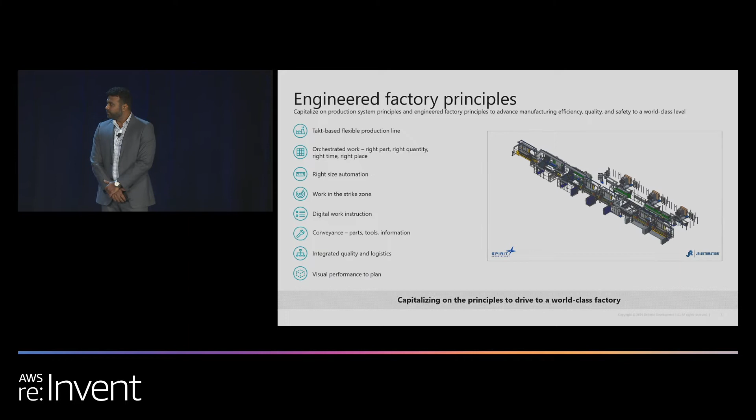So the project we're going to talk to you about today is called FloorSight.

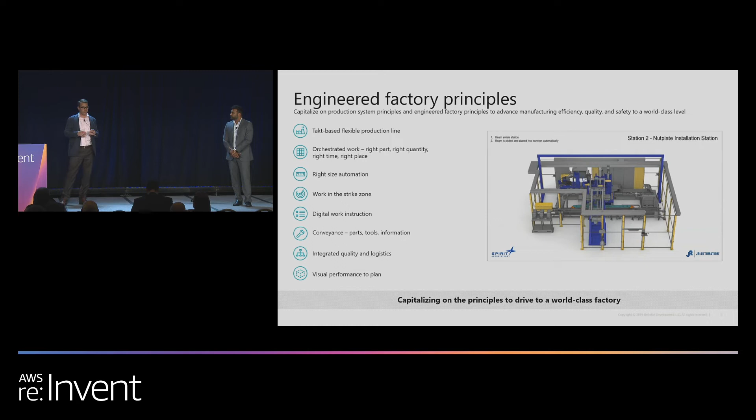Before we get into the details of that, we really want to talk about the broader portfolio of projects we're using to transform the way we do work. There's about 50 projects. One of them is on the screen here.

It's a new production system that we just finished 100% design review on, which will go into operations next year. This is going to create floor beam assemblies—there's over 250 different variants of floor beams that go on a single fuselage, for instance.

This production system takes into account the 8 different engineered factory principles that we developed from observations of world-class manufacturing systems and lean manufacturing principles.

So as you can see in the animation, we have a takt-based flexible production line that moves parts at a known takt time to different work cells. We're orchestrating the work, making sure we're doing the right work at the right place, the right time, and the right quantity.

We're utilizing right-size automation in places where automation makes sense. So here on the screen, for instance, is automated fastening of brackets. And where full automation doesn't make sense, we use right-size automation and semi-automation for workers in the cells.

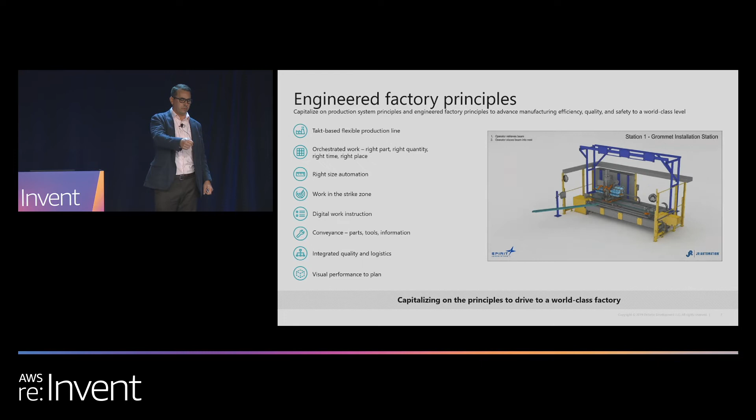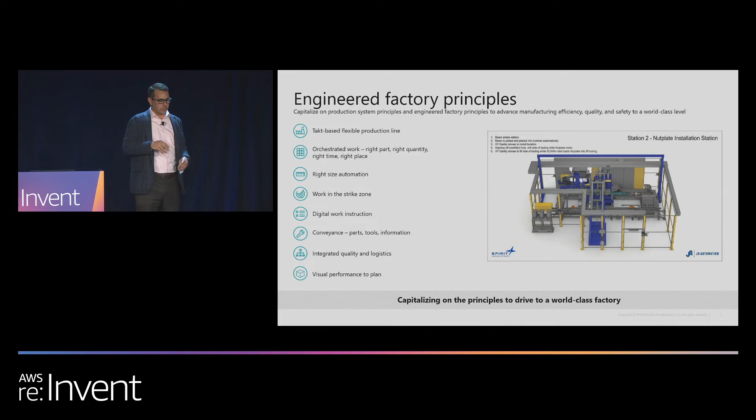Here you can see examples of pick-to-light bins so operators know what parts to pick. Their tools are instrumented so they know that for that specific part, they need a specific torque value, and the tool only delivers that exact torque value. Work instructions are projected down for the operator to see exactly where that part goes and at what time it goes on, so that we can orchestrate all that work.

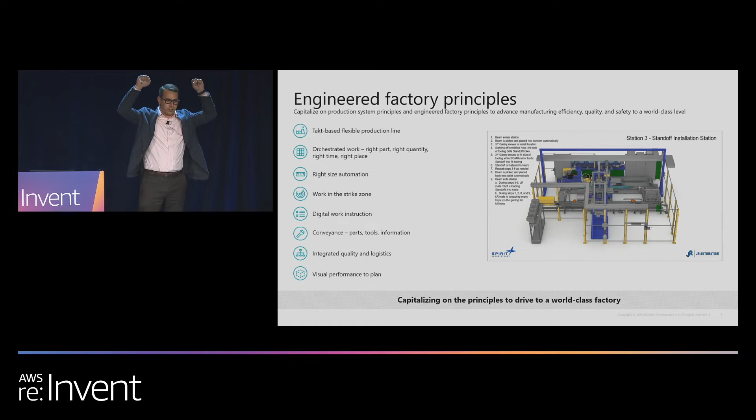Another main principle we use is what we call work in the strike zone—making sure we're presenting the worker with all the right tools, parts, and work in an area that makes ergonomic sense. If we can reduce worker fatigue from working overhead or leaning over and picking up heavier objects, that helps us build better quality parts, and is safer for the workers and for the flying public.

I talked about digital work instructions. We're not only projecting them, but we also deliver them through a variety of different devices—augmented reality, virtual reality—mainly for training purposes.

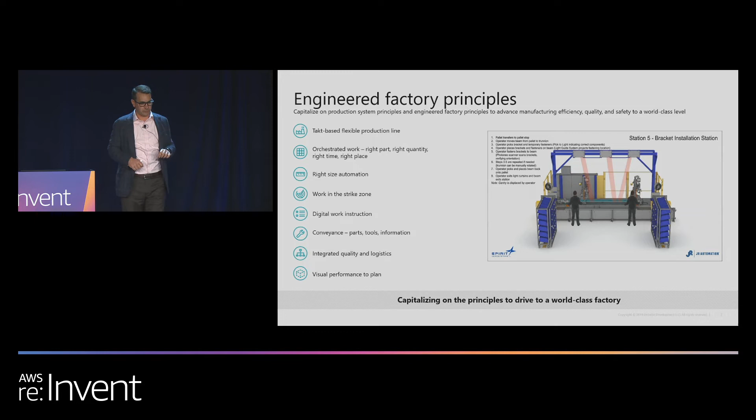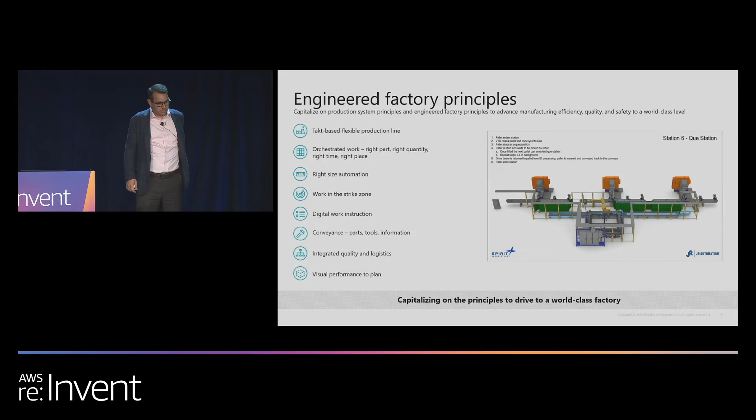And then when it gets down to the actual display of the work instructions, we use tablets, computer screens, laser projection, part projection as well. Conveyance, as Subhash talked about, is not just the parts, but also the tools and the information, which our solution that we'll talk about today really takes into account.

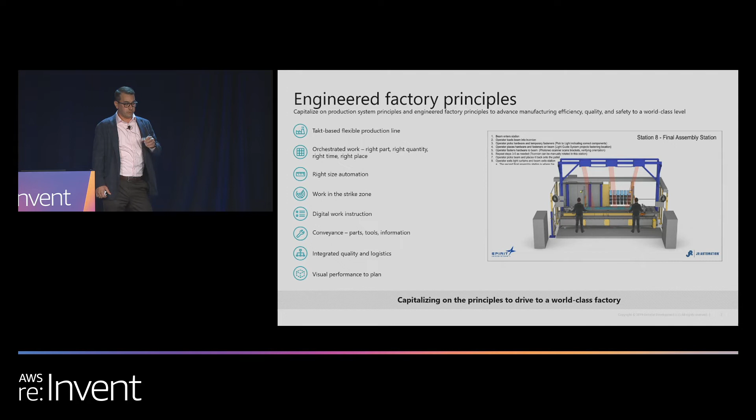And of course, when we create that digital thread, we can integrate quality and logistics directly into it, and ultimately we can display performance to plan directly to the worker, so the worker knows exactly where they need to be and how they're being measured against that goal line, and their supervisors are able to actively see performance to plan and make adjustments as needed on the fly.

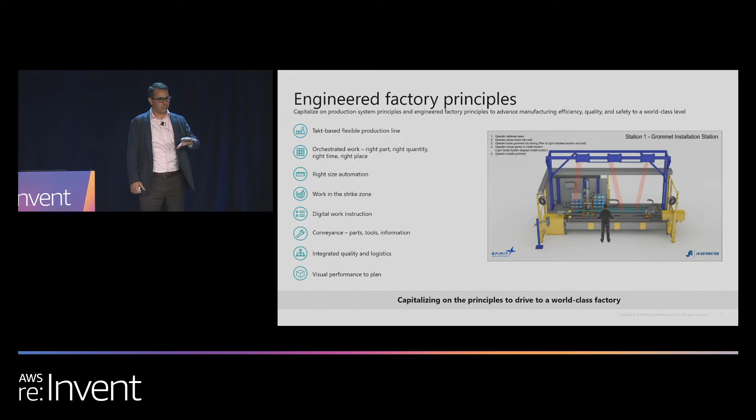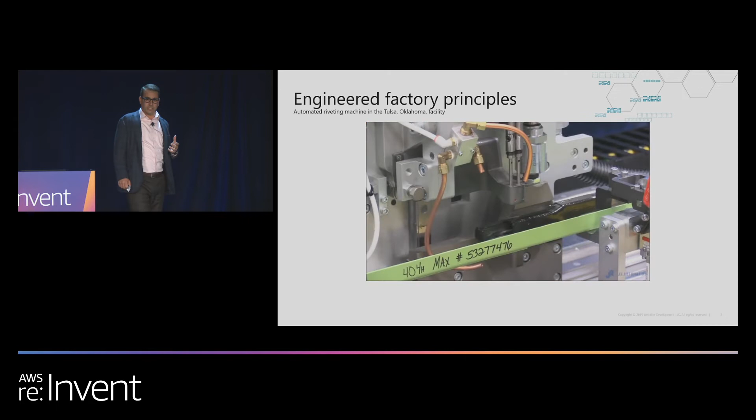Here's an example of a cell that we installed this February, one of our first cells in our engineered factory. So what you're seeing on the screen here is actually what we believe is the first fully automated nut plate machine in the world. Now, those of you that aren't in aerospace may not understand the magnitude of what I just said there, so let me explain.

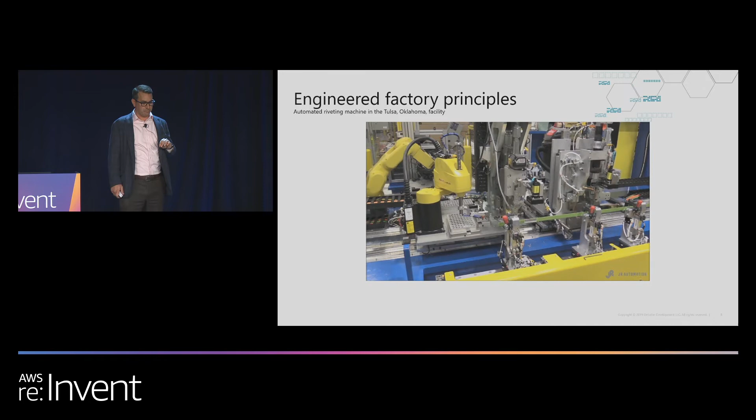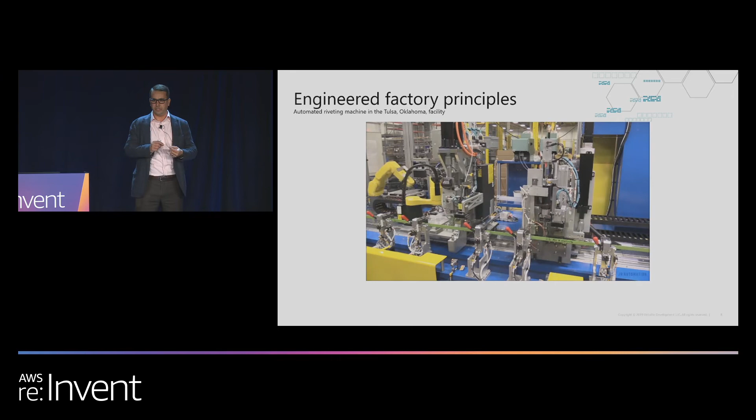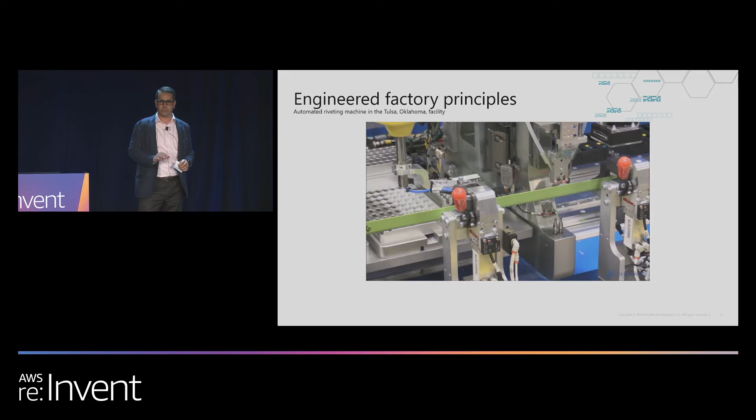A nut plate, you can see them on the screen there, is basically a nut that's fastened onto structure that allows parts to be taken off an airplane. So lots of parts need to be taken off to inspect an airplane in service, so nut plates are put on there. To give you an idea of how many of those go on an airplane, just for the fuselage that we deliver to Boeing on a 737, there's over 35,000 nut plates that are installed. Each of those has 3 holes, 2 holes that get rivets in them.

These have been going on ever since airplanes have been made, and it's roughly done the same way up until this cell here, where a person manually drills holes, puts rivets in there, and manually squeezes them. So you can imagine the amount of labor that goes into that, as well as the opportunities for quality missteps. So that cell there is taking some of our principles, and we brought them to life.

Fantastic. So we spoke about the digital thread. We spoke about the engineered principles. Now let's see how all of this comes together in the solution called Floorsight that's deployed out in the factory floor. We'll divide it into 2 sections, which is more of the front-end component of what this conveyance looks like and what the operators and supervisors interface with.

I believe you would have seen in the video a large 86-inch monitor that's touchscreen and 3D enabled. So there's a lot of different components and pieces within that solution that they interface with. And then there's the back-end components, all the different complex data sources and data pieces that we retrieve information from, and we project back to the folks on the floor.

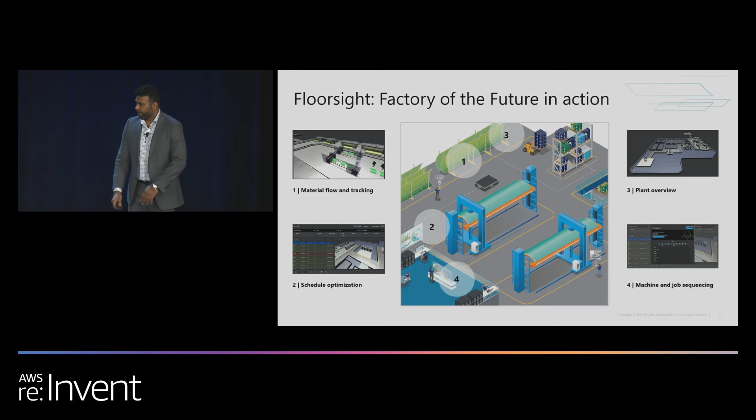So some of the complexities you saw in the video—you notice big overhead cranes. In our factory that builds these, we're relying on overhead cranes for movement, and those can oftentimes become the bottleneck in the whole value chain. So part of what this solution provides is the ability to increase machine utilization.

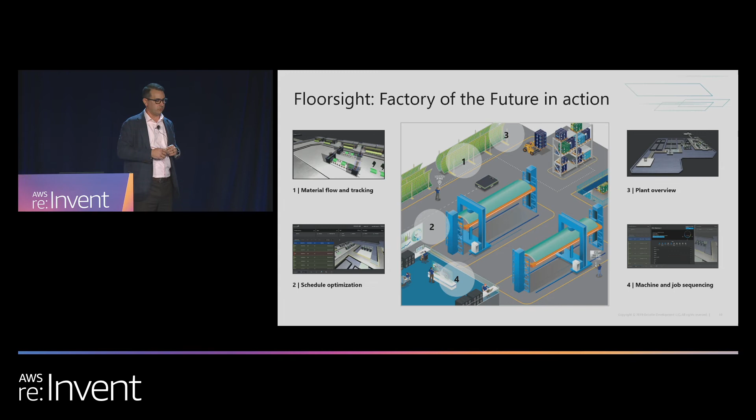We've also developed an app that automatically calls the crane to have it come when the machine is scheduled to be finished, which helps us collapse lead times. And ultimately, this solution really helps us reduce our inventory as well, which is critical, especially with these larger parts and the amount of value carried in that inventory.

So we take all that data and pipe it to the cloud, where we apply a whole bunch of different business logic and algorithms to it. But it's designed with the evolution of the digital thread in mind, right? It's designed with components like AWS Lambda, where you have serverless architecture, event-driven computing, and event-driven architecture. Lambda's coupled with Python or Node.js, depending on what we're working with. And having API gateways, where you interface with these applications, you provide Lambdas in accordance with your objectives. Having RDS and DMS—when you bring this information in, you want to make sure it's accurately structured.

You want to make sure that ETL process is applied to it. And ultimately, that data gets consumed by the front end, where the operators and supervisors on the floor are interfacing with. So you don't want to have lag times between that data point, or lag times on how your front end deals with the back end. That creates a very bad experience.